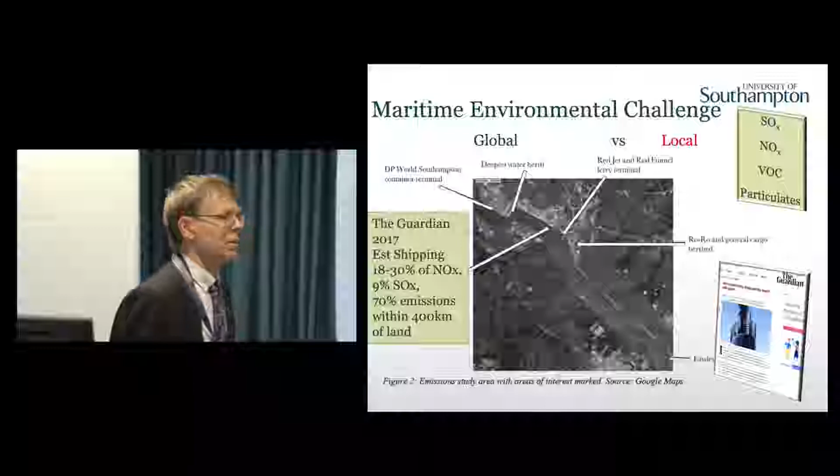Now if we look at the local environmental challenge, I've put up a Port of Southampton map with a few bits pointing out where ships come and go. Moto gave a very good explanation of all the types of emissions that influence air quality, and we know that those emissions have quite a significant impact on populations that are exposed to them.

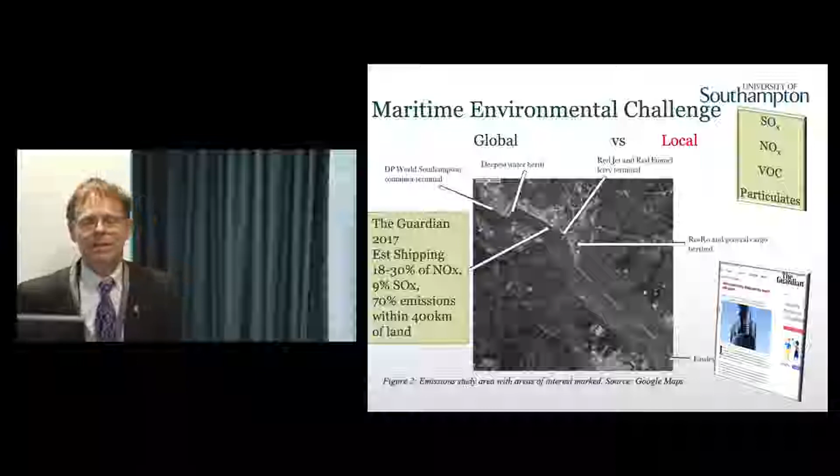The Guardian did an article about dirty ships, diesels being the worst offenders. You may disagree with their slant, but they looked at some fairly robust measurements of how much shipping contributes to global NOx and SOx, and that 70% of our emissions are within 400 kilometres of land. Whether that's a relevant dimension, I'm not sure, but it certainly sounds like a lot of emissions go not too far away from where people live.

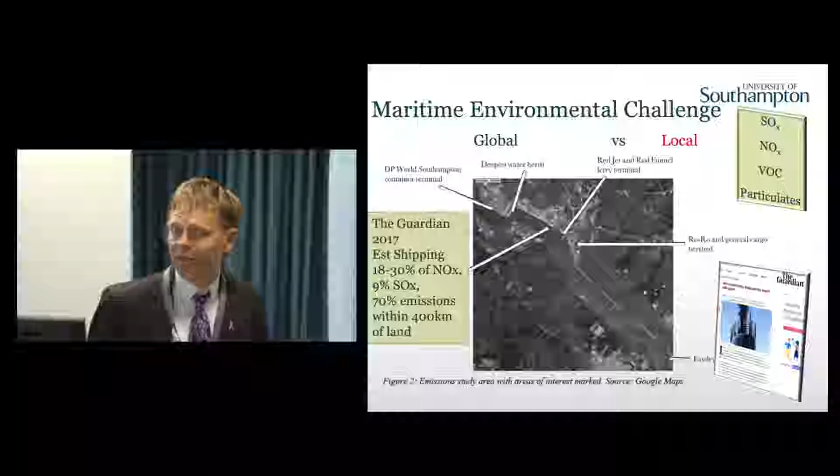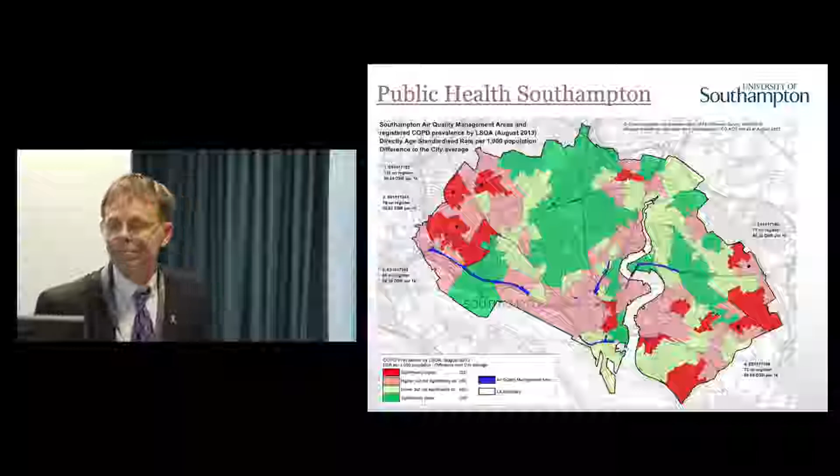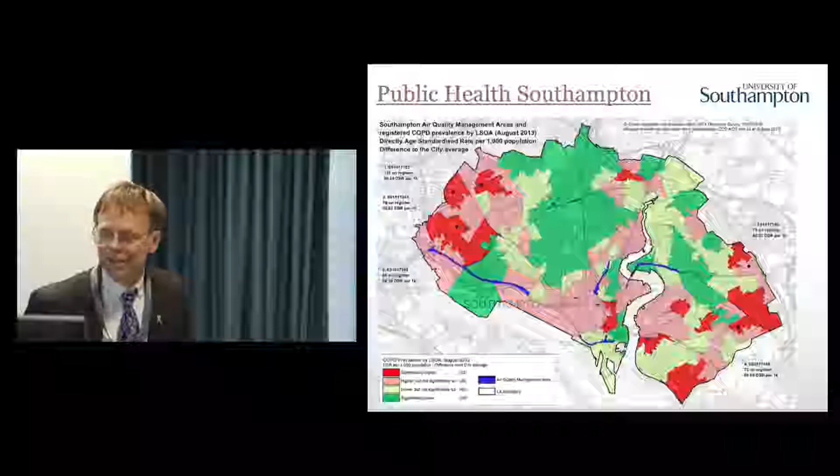Public Health Southampton has looked at the occurrence of various medical conditions within the city of Southampton. And you have to ask, some of those will be related to air quality issues within the city, and where are those coming from? The highlights of some of those areas may be of some concern when we think about southwesterly winds from what's happening in the port and other activities.

So we had a recent student project, Cameron Owens, and this is an example of big data being one more of the things that we see as a technology that can really help us.

And he took AIS data for one month in October 2016 of all the Southampton Water movements of vessels of all different sizes and activities. And he analyzed that data and said, can we identify from the data if a ship is stationary, so maybe it's on hotel load, if it's doing maneuvering, or if it's at standard speed.

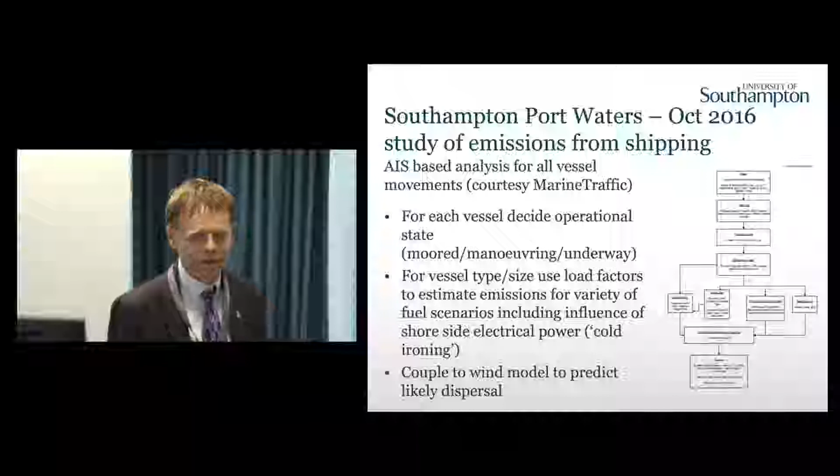And you can look at the operation for a given size and category of ship and estimate what the emissions would likely be. Once you've got that model, you can change the fuel type, and say, what would happen if we moved to a world where everything was fueled by LNG, or we took the cold ironing approach and we connected the ships when they were docked.

And as I said, it's a student project, so it's not as robust as you would want for a full journal publication. But it's interesting. You can do things with the AIS data. You can say, okay, where the ships are going backwards and forwards along this. Sorry, I can't point to it.

You can see where the majority of ship movements are within the port, and this is estimating where the CO2 emissions were coming from over a period of time. And you can see these are effectively sources of emission, whether in this case it's CO2, but equally NOx or SOx.

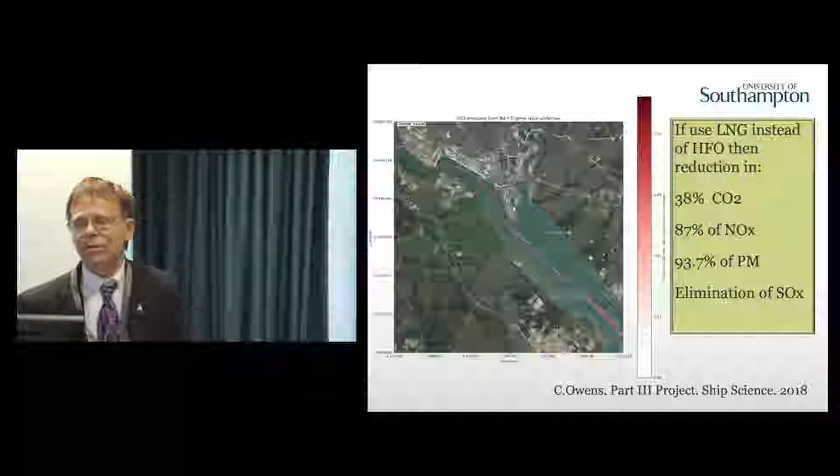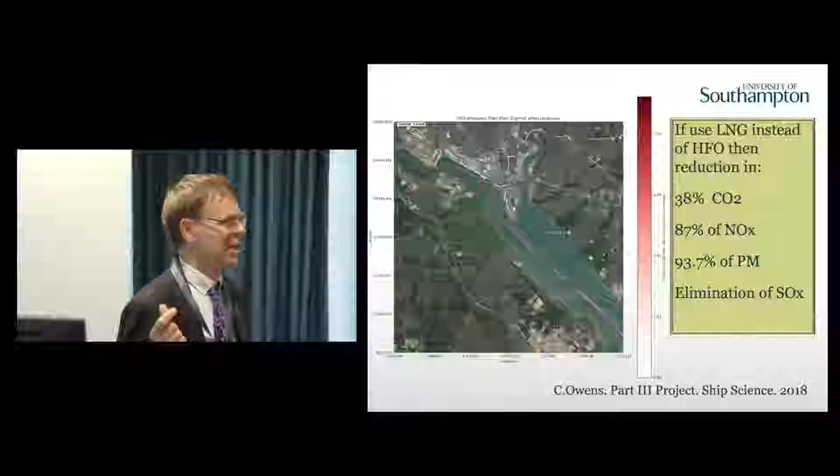And his preliminary calculations: if we change to LNG as the fuel instead of heavy fuel oil, then a 38% reduction in CO2, 87% reduction in NOx, 93.7% reduction in particulate matter. These are big reductions, so this would be a very effective way of controlling the emissions from the shipping sector within Southampton Water. But that presupposes that you can make an instant change in fuel type, which, as we know, is not something that's going to happen overnight.

So one of the places I started with my interests in ship powering was I was involved in a Royal Academy of Engineering report. Doesn't seem that long ago, but apparently it's now five years ago. Originally it was driven by the desire to think about the use of small modular reactors as potential sources of power on board ships. But it broadened its context to look at all the future ship powering options.

So it's an online report. It's a really good read. I'd heartily recommend it. I know it's five years since it was created, but rereading it yesterday, it's still pretty on the nail, I think. It examined all the different types of future fuels, presupposing that we're not going to be using heavy diesel fuels, heavy fuel oils, for much longer. So it looked at nuclear, LNG, batteries, fuel cells, methanol, hydrogen as all potential methods of powering ships.

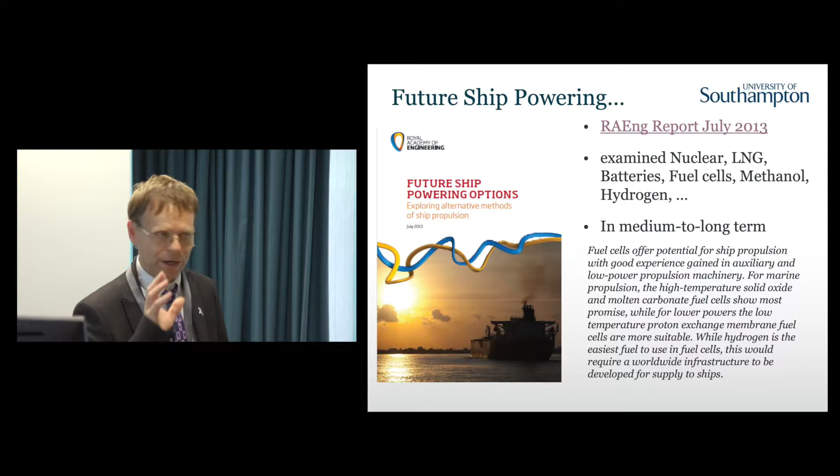My take from it at the time, and still is, is that effectively the direction of travel, if you're looking for clean, emission-free shipping, is towards a world where we would use fuel cells with hydrogen as a potential solution. Now, there's a lot of steps, and I'm going to look at a few of those between where we are now and how we would take those steps along that journey.

And this I think was quite interesting. I'm not sure how visible it will be from the back, I'm afraid, because I just took the diagram, but it effectively looked at reciprocating engine technologies, other propulsion technologies, so gas turbines and hybrid systems, and then hydrodynamic enhancements, and when things are going to be happening. In the short term, the diesel engine is going to be a workhorse for quite a long time to come.

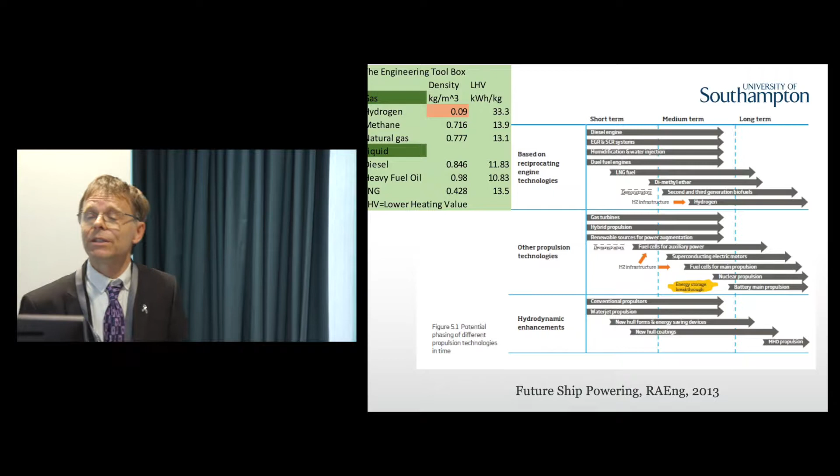As the last speaker so eloquently talked about, SCR systems are now going to be in operation. So that short-term phase is now underway. And looking at other types of fuels that we could burn in existing engine technologies, from LNG, which is obvious, as just gone through, a relatively straightforward way of reducing CO2 and the other emissions, and then potentially going to a world where we're using something like hydrogen, probably as a mix with some other fuel, inside a standard engine or a modified version of a standard engine.

And then we go more radical, and we're probably talking about all-electric ships. And so then hybrid systems come in, mixing up the energy, and potentially battery-only powered ships. And there are already some examples of smaller vessels which are just using batteries to provide a locally clean way of powering the ship. And I'm not really going to talk about the hydrodynamic enhancements today, because that can only ever take us so far.

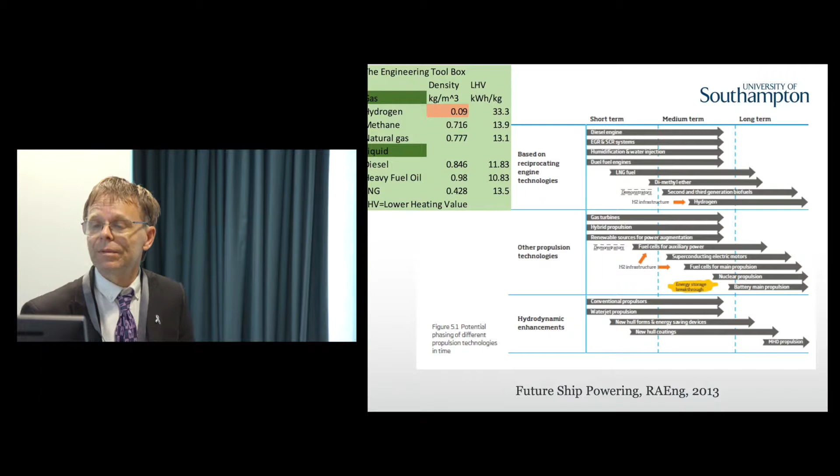The key bit, and why I put the data up here, if we look at gas and liquid, it seems to have chopped off the liquid bit, but the key bit here is the energy we can get out of a fuel. So 33 kilowatt hours per kilogram of hydrogen, compared to the sort of 11 or 12 for diesel. So it's nearly 3 times as effective per kilogram.

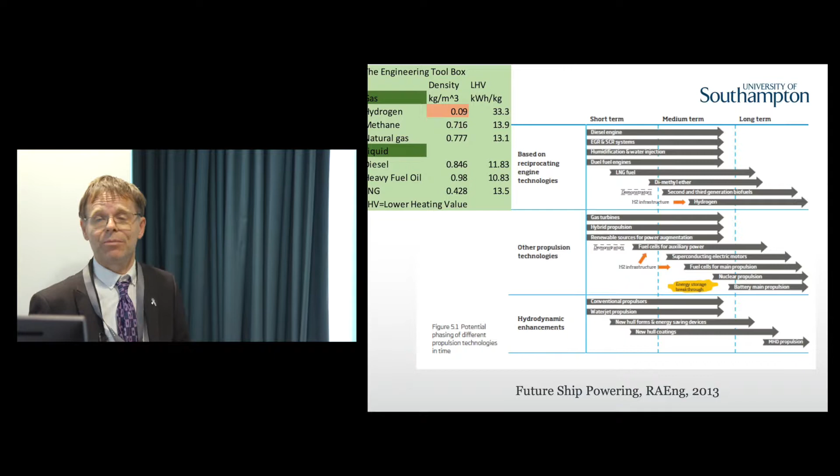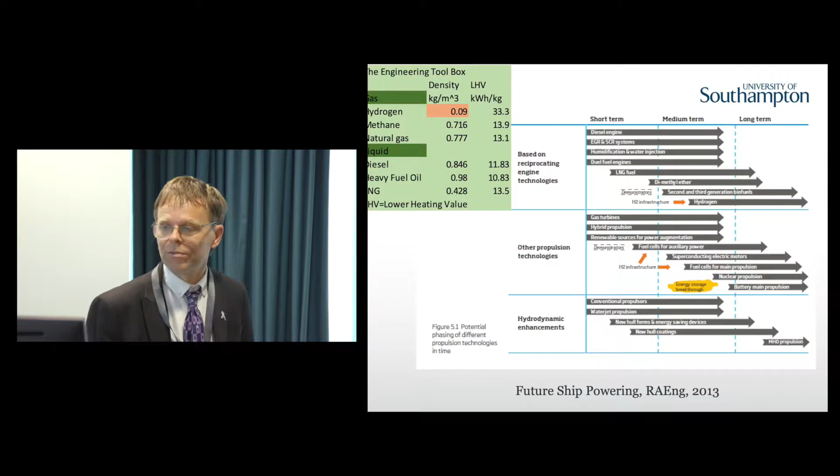But actually what matters is the volume that you need to store it. And hydrogen has a very low density as a gas. It has a higher density when stored as a liquid, but you need to do that at a very cold temperature. And if you store the gas at a high pressure as well, you can reduce its volume. So you end up with probably 3, 4, 5, 6 plus times the volume required to store a given amount of energy, and that's not going to change how much energy you need to move your ship around. So you're now thinking about a larger volume required for your fuel system.

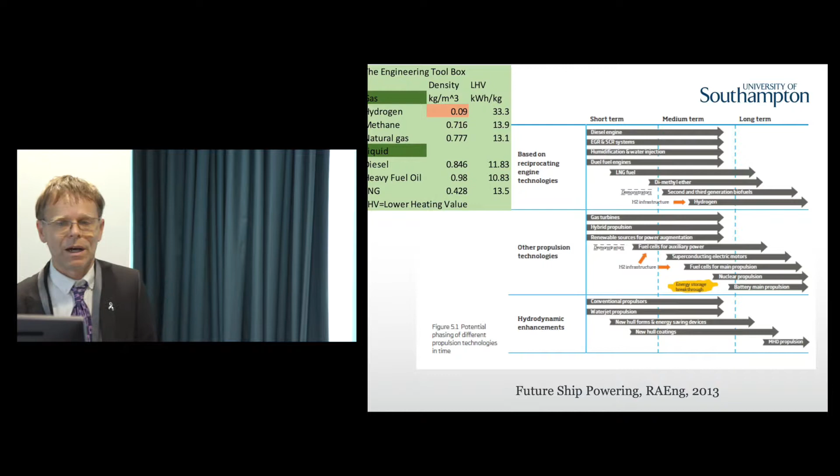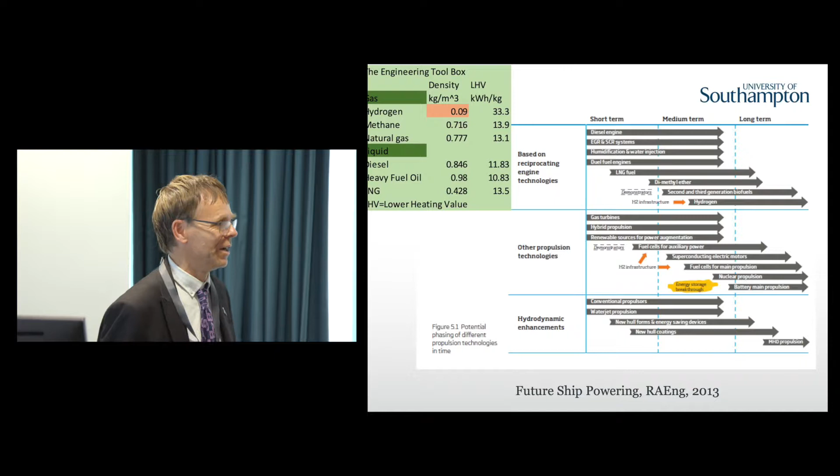And as we know, when you compare the combustibility of something like hydrogen in comparison to heavy fuel oil, we have a very different regime there as to the safety aspects that need to be considered.

So I know there's some work led out of University College London where we've looked at how we decarbonise shipping, how we go from where we are at the moment, where 2-3% of the world's CO2 is coming from shipping, to a world where, if shipping expands at the rate it is expected to and doesn't do anything, but the rest of the technologies around how we use energy decarbonise, then shipping will become ever more a bad boy with regard to its contribution to the climate. So there's a real pressure, and IMO is pushing on that, which I'm very pleased to see.

But we have ships that last 20, 30, 40 years. So if we have a ship which we are operating now, can we retrofit technology which will give it less of an impact in the immediate, before the fleet has renewed itself? However, with retrofit, it's much harder to change our energy use. It's typically limited to certain ship types where you might feel it's economic to do this. And typically you're probably going to add mass, but for some of these systems it will start to build demand, and that's where the demonstration projects being funded really help stimulate the market to think, well, actually it is possible to do it. Somebody has gone through the safety and regulatory hoops to make it work. What can we learn, and how can we scale up from that?

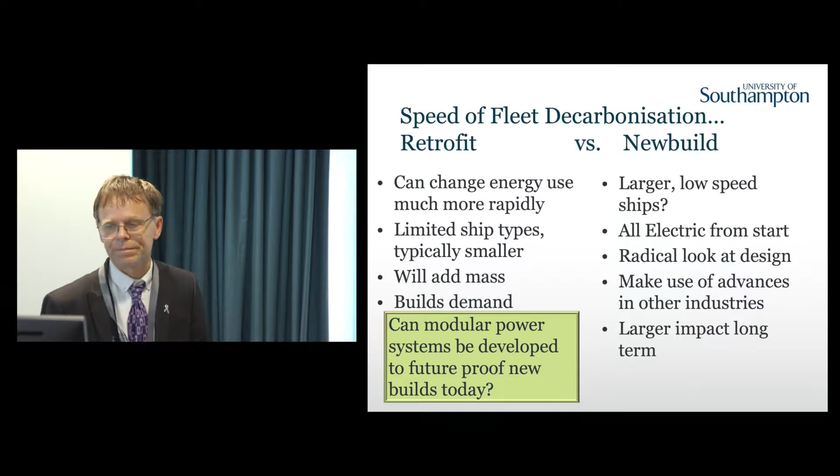So what are the solutions? Hopefully some of these are starting to come to fruition. We started looking at hybrid systems probably about 8 or 10 years ago, and to some extent we were mocked for doing this. They said, that's never going to happen in shipping. It's not possible. It's too expensive. If we look now, over the last 2 or 3 years, how many people are talking about hybrid systems is going up significantly every year, because we're starting to get a tipping point, especially with auxiliary power.

You know, the battery technologies that we can purchase have come down in price. The volume of production is starting to increase significantly, so suddenly there is a real opportunity to do that. And when people look at the EEDI, if you can use a hybrid system where you've got that power boost from your batteries to deal with emergency situations rather than installing a larger engine, it becomes again a cost-effective thing to think about doing.

Even now, at the smaller end of the vessel market, there are people looking at complete main power systems which go all electric, and that moves us to a world where we're looking at fuel cells rather than using some kind of more conventional fueled system. But that's a few vessels at the moment, as I say, demonstrators and ones that will explore the opportunities.

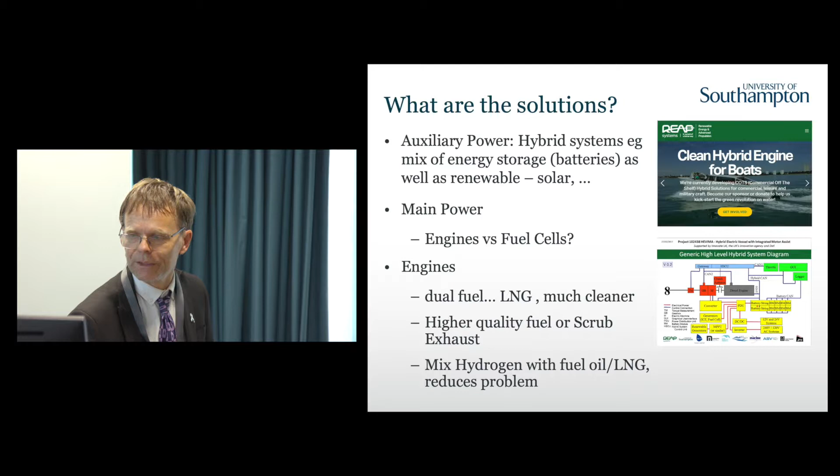What you've then got to think about is how you actually manage your hydrogen fuel on board your vessel, and do that if you're looking at a retrofit solution. That could be quite a challenge, and all the regulatory processes that sit around that. I know there are companies already looking at that design space. I'm aware of one in Holland that's actively pursuing that as a potential solution for retrofit. So again, a bit like with the hybrid use of energy storage on board vessels, it may be something that happens more quickly than people anticipated, or at least the first solutions.

Fuel cells, for those who are not aware, are a direct conversion of an electrochemical reaction into electrical energy. It looks kind of like a battery in reverse. We allow oxygen and hydrogen, if we're using that as a fuel for the fuel cell, to permeate, and between the anode and the cathode we create a reaction, and that reaction creates an electrical output, and then we apply that to a load, and hence we can use the electrical power to move our ship. There are two types of technologies, primarily proton exchange and solid oxide fuel cells. They are like little batteries all put together. You take many cells which develop a small potential, put lots of them together, and you suddenly have a stack that can create a significant amount of power.

Like batteries, they're restricted in how many cycles they can operate for, so there's a problem possibly with restricted life and then costs associated with replacing them. There's also a problem that they don't respond very quickly to a demand. So if a demand comes up, it's going to be a while before it reaches the amount of power that you're trying to demand. So that's a problem about how we manage the fuel cell.

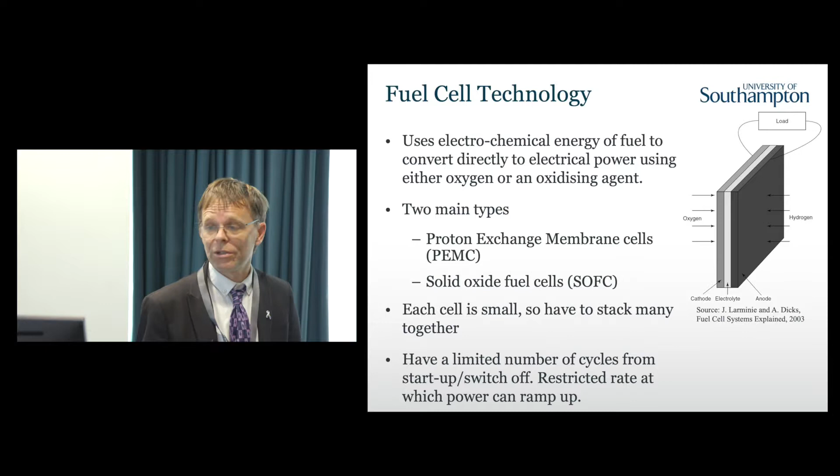It's interesting. In the last 5 years, fuel cell systems are scaling up the technologies. I just picked off one company, PowerCell in Sweden; they're developing a 3 megawatt system for a 40-foot container. And this is a complete system. So we're starting to get to the scales which look feasible. I picked up 2 or 3 companies there, all of whom are actively in this market and looking at large systems. You can look at putting some of them shoreside, so you have a clean source of energy for mooring up ships. Your infrastructure is there with a container.

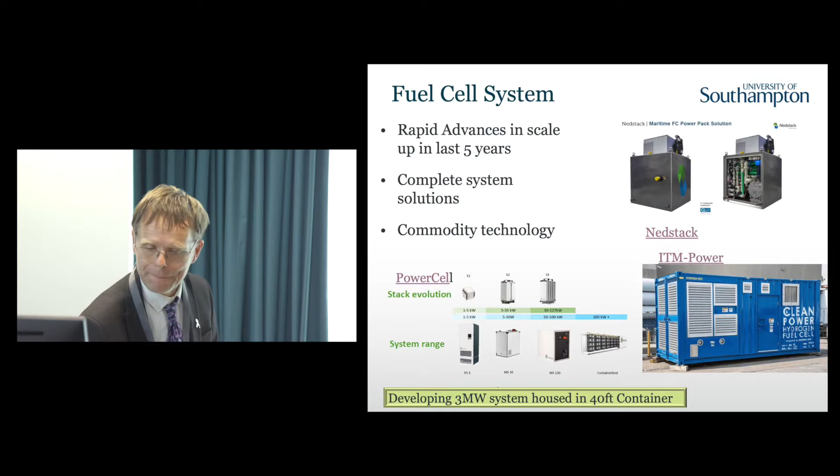So the challenge with the fuel cell, and this is one of our pieces of work that we've done over the last few years, is looking at the energy management and how you design a system which has got the right amount of fuel cell, and actually because of the charge up time you need a battery as well. So it's a hybrid system, you need a fuel cell and you need batteries. How do you size the relative components?

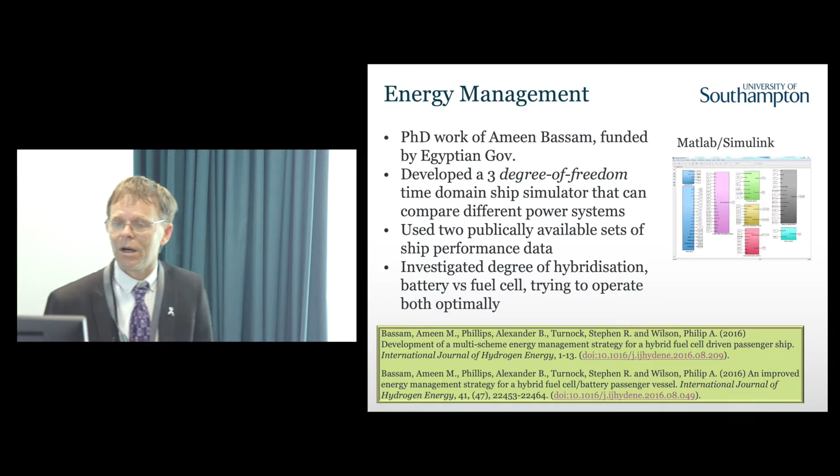How do you understand whether you can satisfy all the safety requirements as to how much power the ship has in hand, how robust and redundant are those systems. We use publicly available data from a vessel which had been operated and stored all the data for its operation. And the PhD student created a MATLAB Simulink model which allowed us to navigate the ship on its voyage there and back, show that our energy demand met what had been measured, and then we say, right, now we've got a system where we can put in different fuel systems, as it were, and see how we size it to make it work properly.

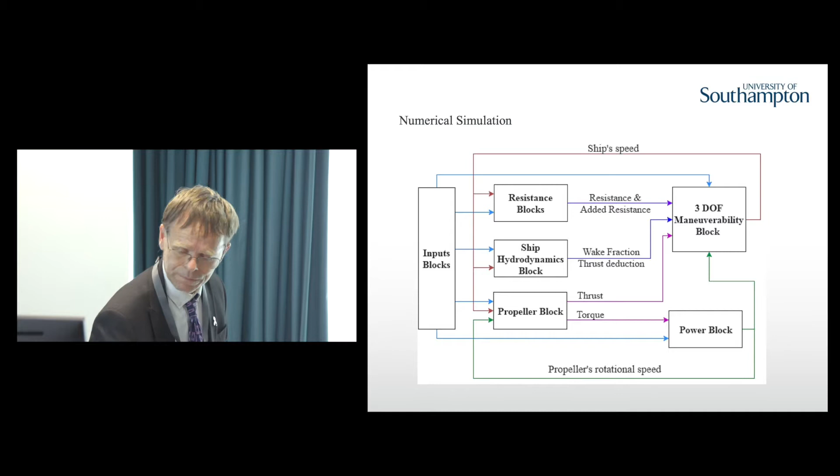So this is, if people are interested, the data's out there. It's Smyril, I don't know how to pronounce that really. 123 meters, the vessel for the Faroe Islands. So it's a reasonable scale of vessel. But the good thing is that the energy demand is there. So it's now, can we design a system which supplies that energy? And we did a comparison between a conventional diesel system and then a mix of fuel cell and battery, managed together with the electric motor drives.

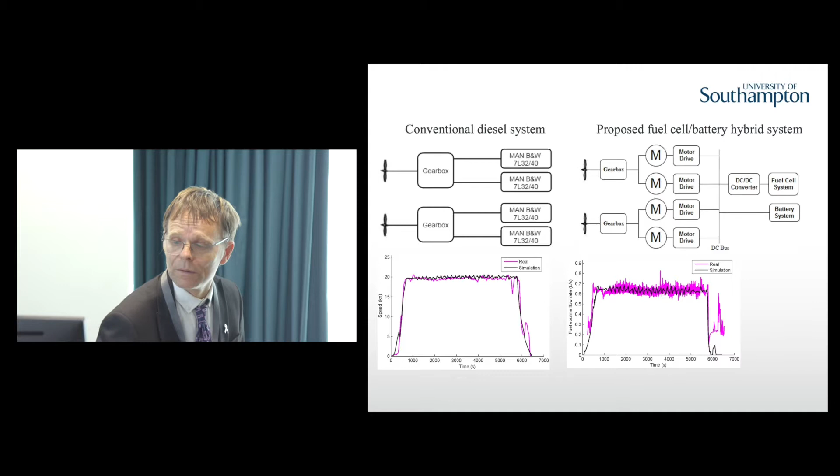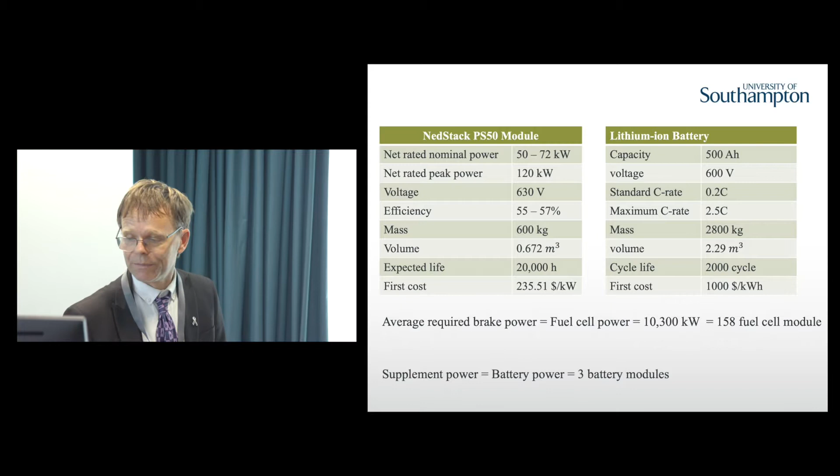At that stage, we were looking at the NedStack fuel cell. So rated power per module is about 50 to 72 kilowatts. And you stack a number of these together. You put a lithium-ion battery in as your storage. And again, the costs here are quite large for the battery at that stage and the NedStack. And that was probably 3-4 years ago now, so costs will probably have come down. And we needed a lot of fuel cells, and we needed some fairly chunky batteries as well to make the whole thing work.

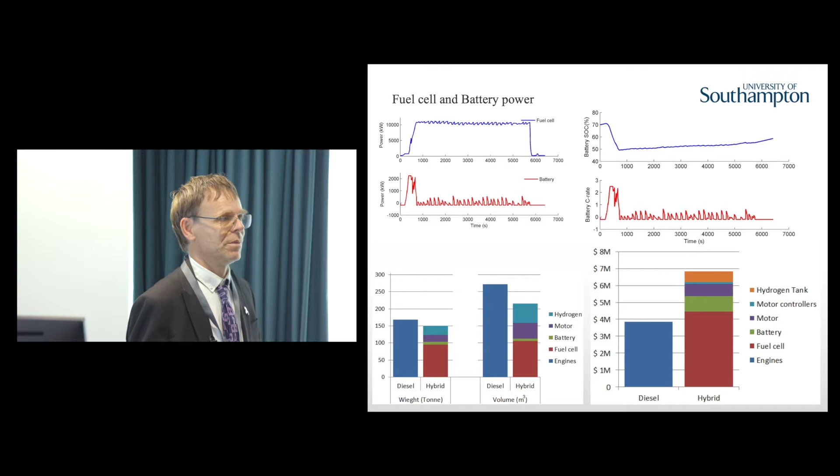Similarly, the lithium-ion batteries and the fuel cells in particular, if we see commodity products like cars driving their mass production and their costs are coming down, that technology then becomes much more cost effective for the maritime industry to consider.

We had a few open sessions at the last 2-day meeting in Trieste. Seeing the companies and organizations presenting the developments in hydrogen and fuel cells around the world is really quite exciting. There's a lot of things going on, and actually a lot of the technology challenges which we could envisage are actually being actively addressed. I guess from my perspective in the UK, I think this is an area we need to be pushing at as well, because technology-wise, many of the solutions we find there will have a worldwide marketplace.

So, just remembering some of the challenges we face with hydrogen as a fuel. Its safe operation, storage and pressure at low temperature, and its volume, those trade-offs. And actually we start looking at refueling a ship in a similar time that we have at the moment. That's a lot of hydrogen we have to move from a bunker vessel or shoreside on board a large vessel. So that poses some challenges. People never really had to deal with hydrogen at those kinds of flow rates.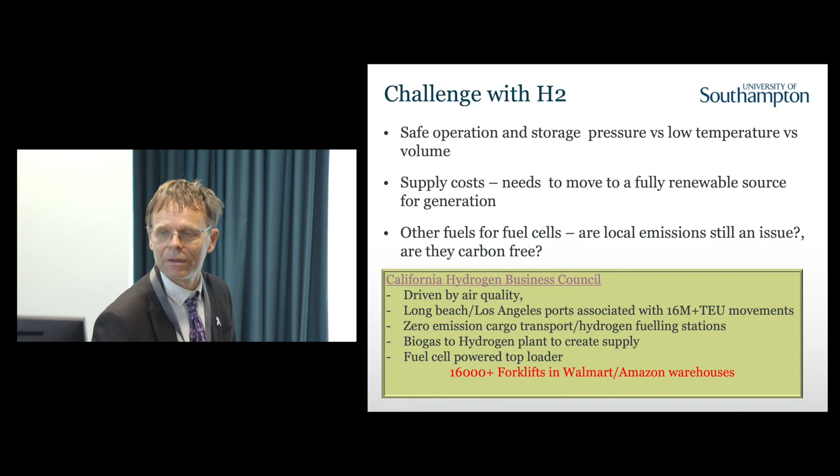So the final slide, as it were. So how do we go from a world where we've got less than 200 kilowatts of installed hydrogen fuel cells out there to being able to install 50 megawatt plus systems on our vessels? Infrastructure is probably the biggest challenge, and LNG also faces that as a challenge. But maybe we'll learn some of the lessons from the LNG process and actually be able to piggyback on top of that with liquid hydrogen.

The production process has got to get somewhere where it's really going to take off. I've got a slide, a capture from a Wärtsilä website where they're looking at floating distribution hubs for hydrogen. I think the real driver that will really make it cost effective is when fuel cells and hydrogen start being rolled out, not necessarily in cars, because they'll probably go with batteries, but larger vehicles. And if they start installing 100 kilowatt, 150 kilowatt type systems there, those costs will really get pushed down. That makes it a much more viable option.

And it's nice technology. You can treat it like a battery. You can plug them all together. It makes redundancy built in, as it were, because you've got many systems. You could take one or two out and maintain them. It probably means it's easier to have autonomous power systems for your vessel because it's electrical power. You've still got the challenge of the hydrogen, but that's going to have to be a very controlled process.

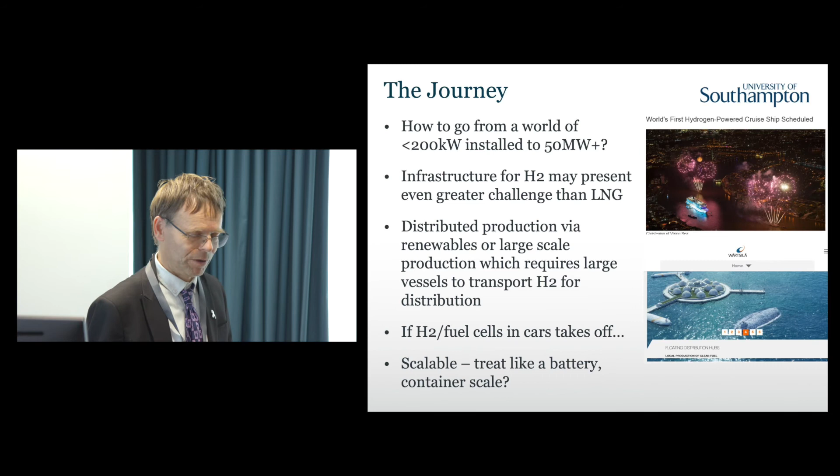What would be really nice would be to find some higher density method of storing hydrogen. I've got some colleagues in chemistry in Southampton looking at things like nanotubes, but this technology is probably a long time in the future.

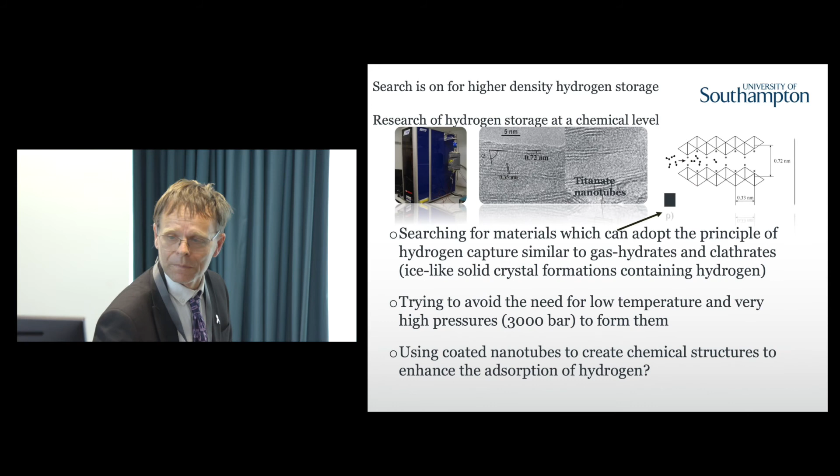So just to sum up, I think hydrogen is looking much more promising than it was 5 years ago. I think there's much more confidence that the technical challenges are actually solvable. If fuel cell technology scales and costs reduce, then it becomes ever more viable. Likewise with hybrid storage, we're already seeing that. And if cities and port areas enforce really strict local emissions standards, that will force quite a lot of the operators to actually start converting their vessels, which we'll see is happening, and they'll become cleaner, and then some of the infrastructure effects will start to take hold.

Will it be a world of fuel cells, or will it be a world of engines? I think that's one of the exciting things about this. I don't think anyone knows that answer at the moment. So I've just given you a little bit of a flavour about fuel cells, but I'm equally prepared for the fact that we may go down a world where we still have a nice large engine. However, it's got a very different fuel to it.